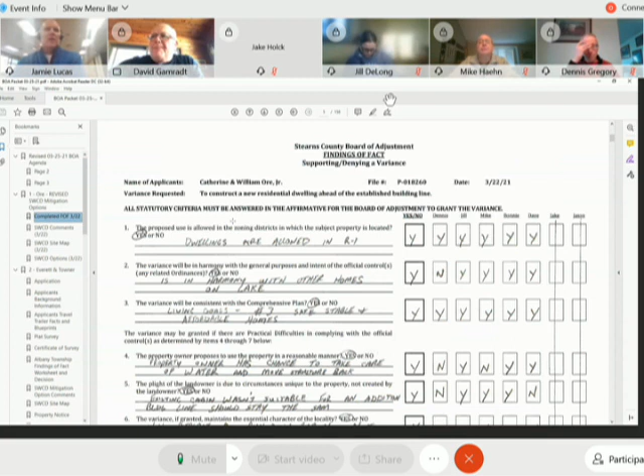Staff, can you give us an update if there's been any changes or any information that you'd like to present to us? Sure. Thank you, Madam Chair, members of the board. Just to reiterate, this is to construct a new dwelling ahead of the established building line. The findings of fact that were obtained Monday night are the ones you see on your screen right now. So really, I've had a little bit of a conversation with Mr. Ore about the mitigation options that were offered by Soil and Water Conservation District. He is now aware of those recommendations, and I think at this point you guys can go through your discussion making a motion for this. Okay.

All right, Mr. Ore, is there anything that you wanted to comment about your discussion with the proposed conditions?

No, Jamie made it very clear about what was being suggested, and I understand it. All right, thank you. Then we're looking for board members. Is there someone that is?

Madam Chair, members of the board, I just want to let you know that I did get some clarification from Mr. Berg at the Soil and Water Conservation District. Mr. Ore brought up a good point that if you look at the mitigation options on the aerial photo—Shelley, can you go up to the next one?

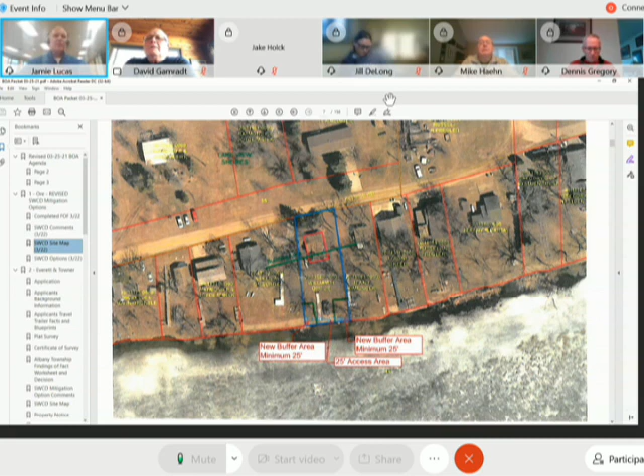Yes, thank you for that clarification. I think we were all kind of looking at that 25 feet going the other direction. Right. And one other thing he mentioned is that their standard for these types of buffers, they recommend that 25% be open for the access area. So if you take 25% of 60 feet, the access area in this situation, their recommendation would be to have 15 feet of access area, and the rest would be buffer. Now, he also said it should be up to you guys as board members to decide if that's the way it should be or not. Okay, thank you, that was just their recommendation.

All right, if we have some discussion from board members in regard to this proposed condition. Anyone have thoughts on what that distance should be, or if this condition should be included?

Madam Chair, Dennis Gregory. As we were discussing Monday night, this is new construction, and I think, regardless of the fact that each of these applicant requests are unique based on the specific conditions of that property, I do think it would be bad policy to allow new construction that doesn't meet the setback requirements and doesn't have a mitigation plan. So I think it should be one or the other, and it seems the applicants are more interested in a mitigation plan.

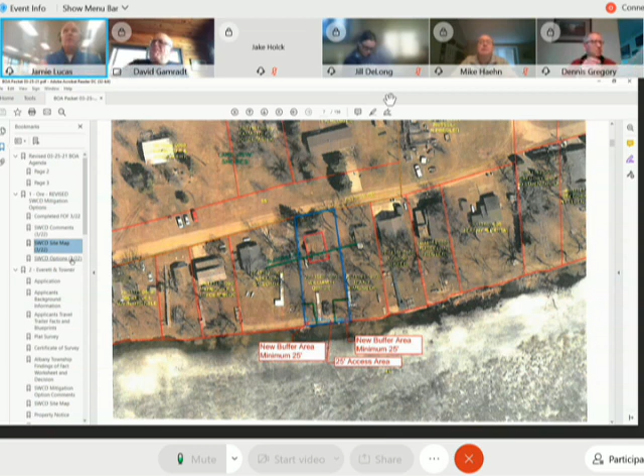Madam Chair, members of the board, can I offer some opinions I got from Greg on that as well? Yes, please do. He said that currently, the way the property sits, there is kind of a ridge at the lake, so there's no way for that water to get over that ridge. So he said a buffer anywhere would be good. That's kind of why he put together—I don't know if everyone saw that second page where he put the green box—he was showing that the house should drain towards the lake, but currently the lake drains back towards the house.

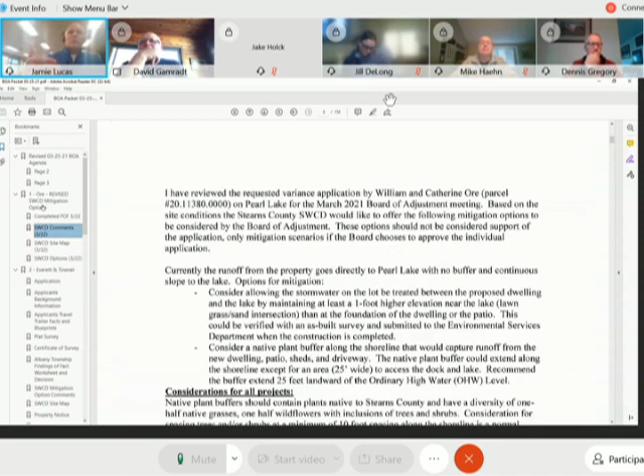So what he was specifying there was he just doesn't want the property owners to fill in that middle area so that everything drains to the lake. He recommended keeping it the way it is right now. He's showing with those red arrows coming from the lake that currently it drains towards the middle of the property to that grassy area there.

Does that make sense? So Jamie, a follow-up question: it says lawn grass on here. Is Mr. Berg indicating that the normal buffer grass would not be in there? Correct, he's just saying it's lawn grass right now. Those are the existing conditions - existing sand and existing lawn grass. That area where those red arrows are, adjacent to the lake, is kind of where that buffer area would be right now, along with their access area.

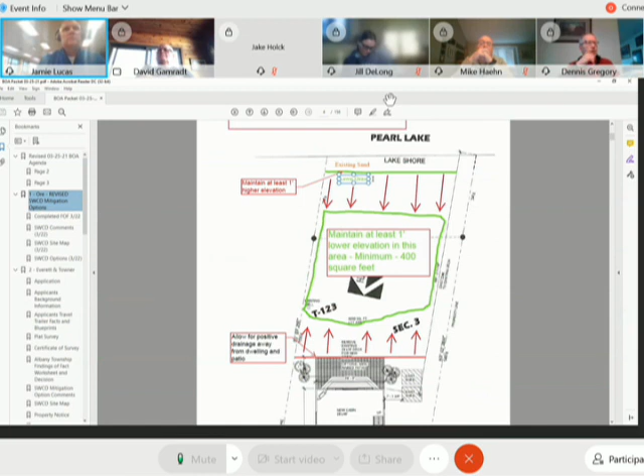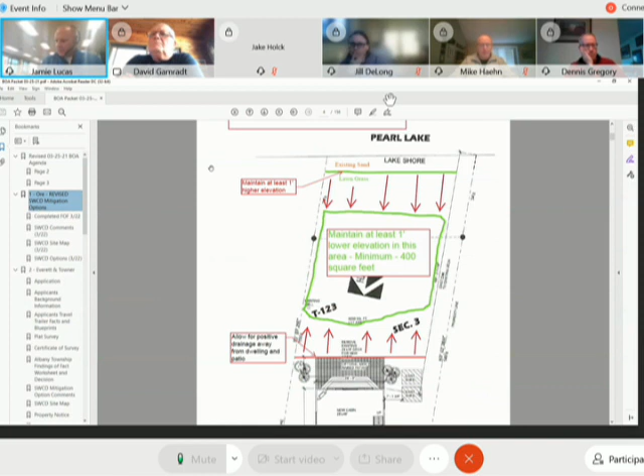So it sounds like it would really be up to the property owner to put the buffer. Correct. He said it didn't matter to him whether we put it in the center. I think he put it there because that's where their dock was. If you look at the aerial photo, he figured they typically have their dock there because when you pull your dock out, you just pull it straight back away from the lake - you don't jog it around on the property. So that's why he put the access area in the middle there. Now if you guys want to leave that up to the property owner, you could certainly do that as well.

Okay, thank you Jamie. Any other comments or questions from board members?

I'd be okay with saying having at least one buffer area that's 25 feet deep from the shoreline. That way it leaves it up to the property owner - they can work with what's best for their property, and we still get that buffer area.

Okay, other comments? Dave Gamradt, go ahead Dave. I would kind of agree with that. I think there should be a minimum of buffered area, and it's up to the landowner how he orchestrates those buffered areas in.

Okay, other comments? All right, it sounds like we're maybe ready to close the public hearing. So moved. Okay, I have a motion to close the public hearing. Is there a second? I'll second. Dave Gamradt. All right, is there anyone opposed to closing the public hearing? Hearing none, the public hearing is now closed.

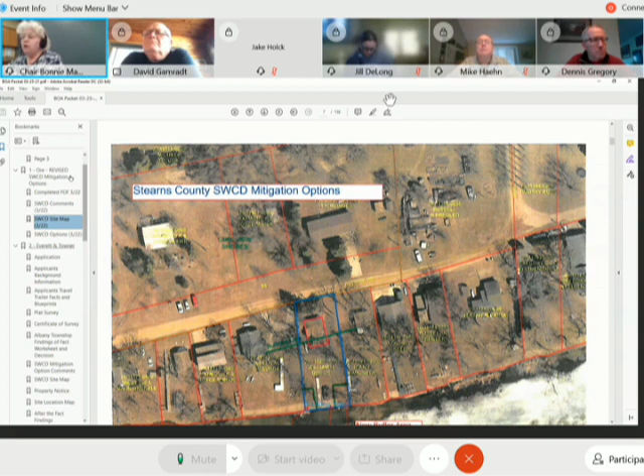Findings of fact have already been done. Is there any comments you'd like to add to findings of fact after the conversation we've just had? If you want to look over the findings of fact on the screen. Hearing none, we'll just accept the findings of fact as they were originally done.

And then we are ready for a motion. Madam Chair, Dennis Gregory, I'd make a motion that we approve the applicant's request for a variance to construct a new residential dwelling ahead of the established building line with a condition that they implement the buffer as recommended by SWCD on 35 feet of their lake shore, leaving 25 feet open. They can choose which 25 feet they leave open, and that buffer would extend 25 feet landward from the ordinary high water level.

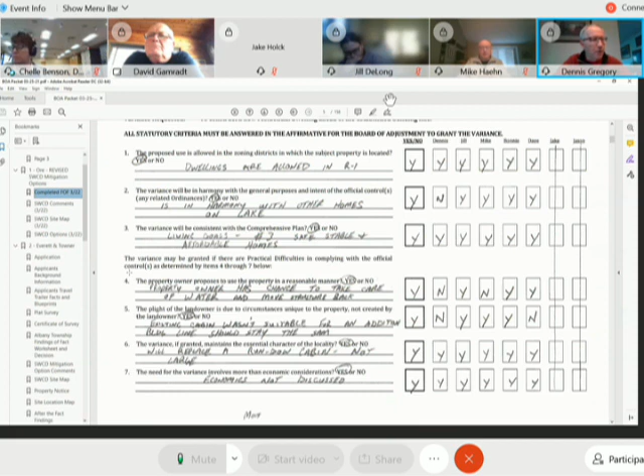All right, do we have a second to that motion? Madam Chair, Mike Haehn, I'll second that. All right, we have a second to that motion, and I'll do roll call of the members present the other evening. Jill? Yes. Dave? Yes. And I am a yes as well. Motion carries.

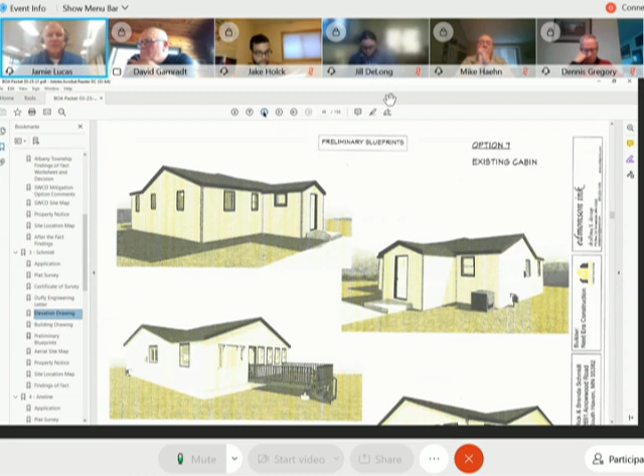If the variance is granted, the applicant will be required to meet the floodplain standards. An additional conditional use permit will be required since the existing crawl space is below the regulatory flood protection elevation. A licensed engineer has developed a plan for meeting the design standards of the state building code. As part of the CUP process, the plans will be reviewed and approved by the DNR to ensure compliance with floodplain requirements.

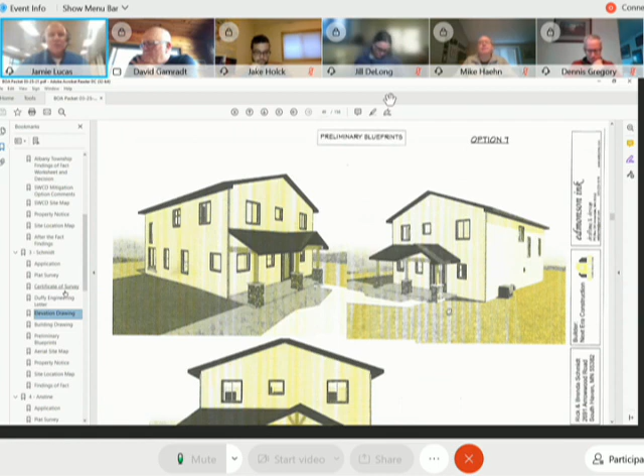The property is in the floodplain and shoreland overlay district of Lake Augusta, classified recreational development. Augusta is on the list of impaired waters for nutrients. The subsurface sewage treatment system was certified compliant in 2020. The current impervious lot coverage is approximately 25.2%, and the proposed impervious coverage when the project is complete will be approximately 24.9%.

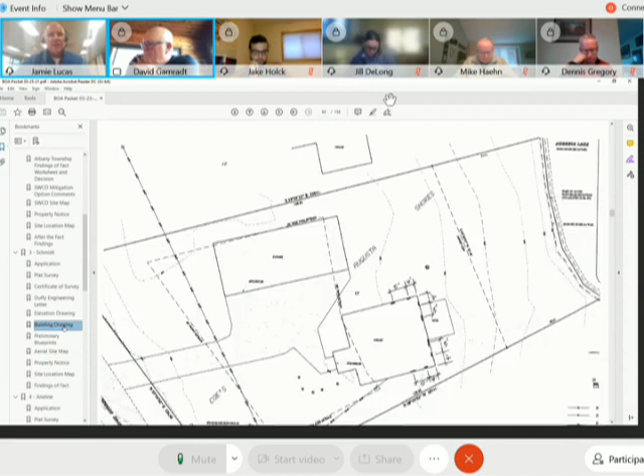The applicant has agreed to remove some of the driveway that will no longer be accessible with the home addition if this variance is granted, bringing coverage to 24.9% with that area converted back to pervious surface. Fairhaven Township, Clearwater River Watershed District, Lake Augusta Association, the Minnesota Department of Natural Resources, and property owners within 500 feet have been notified of this request, and we have not received any correspondence regarding it.

Okay, thank you. Now I'll do roll call as to who was able to visit the site. Dennis? Yes. Jill? Yes. Mike? Yes. Dave? Yes. Jake? Yes. Jason? Yes. And I also visited the site.

All right, we'll go to the applicant, if you have things you'd like to share with us.

I guess just that we bought the place hoping to add on and make it our lake home. Just trying to get everything done the right way. There are a lot of things in this house that need to be done to update it structurally, electrically, plumbing. And if we're going to do all this other work to it, I'd like to make it the way we would like it, because this is our forever home.

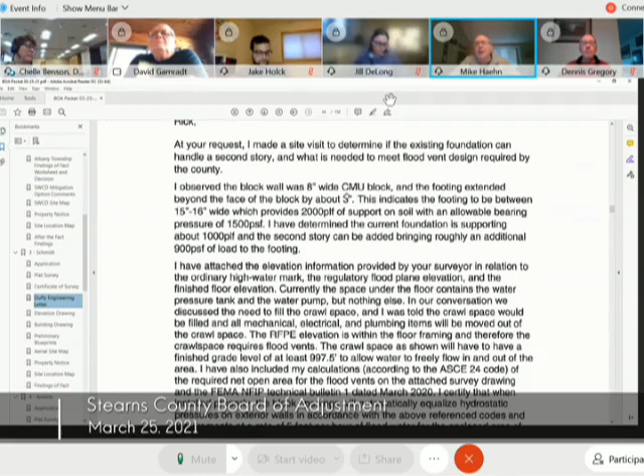Okay, and then also it looked like you had a structural engineer out there for the calculation of the weight. Did they also verify the foundation to make sure everything is okay as far as building, so you don't get into it and then end up deciding the foundation needs to be removed at some point? What I can say, Madam Chair, members of the board, is that the structural engineer said it can hold the weight. Now, whether or not he made that determination clearly, it was not in his letter.

We just asked if we require them to have a structural engineer look at it, and that might be something for us to talk about in the future. We've now had 2 situations where they had this structural engineer sign off on it, and it didn't work out for them. So that will have to be something we as staff and the board maybe have a conversation about - is this really doing what we're wanting it to do? Because I can't say for sure if this foundation will be able to hold it. According to the structural engineer, it should be able to, but I don't know how deep that inspection went. Maybe the applicant, if he was there when the structural engineer was there, can offer some information regarding that.

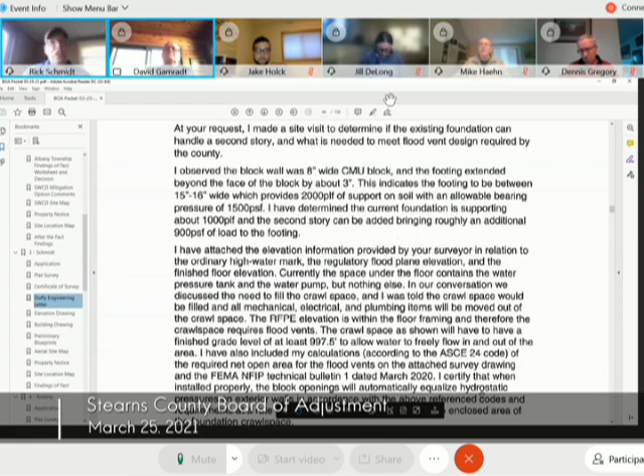Yes, I can. I dug down the foundation before the structural engineer came so that we could get to the bottom of where the footings and everything is, and I did it in 2 spots of the house. He came and looked at it, and he has a formula - I can't explain how he does it - but he used that formula with what was there with the footings and everything. That's how he came to the decision that yes, this will absolutely be able to hold it, and he said it would actually hold a lot more than what we're wanting to put up.

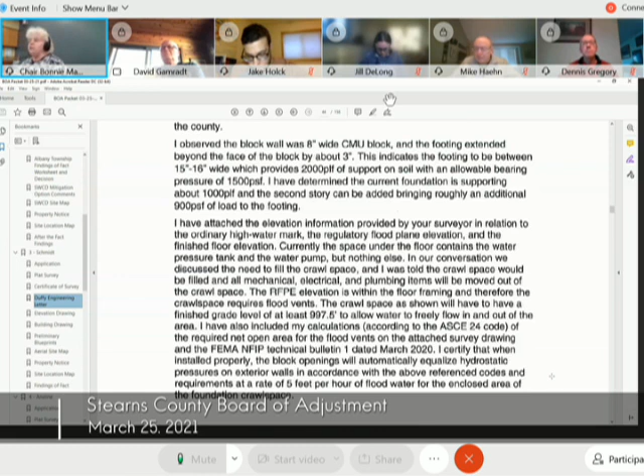Okay, thank you. And Mr. Schmidt, just so you understand why we're questioning this - over the past few months we've had a couple situations in which a structural engineer signed off on something, and then when people started tearing the sidewalls off, they discovered they couldn't use the foundation or structure that was there, and it put the applicant in a really tough spot. So we want to make sure you aren't put in a tough spot by having an engineer say you can do it and then partway through construction finding out you can't. We're just trying to help prevent future problems like that, that's why these questions are being asked.

Additional questions from the board?

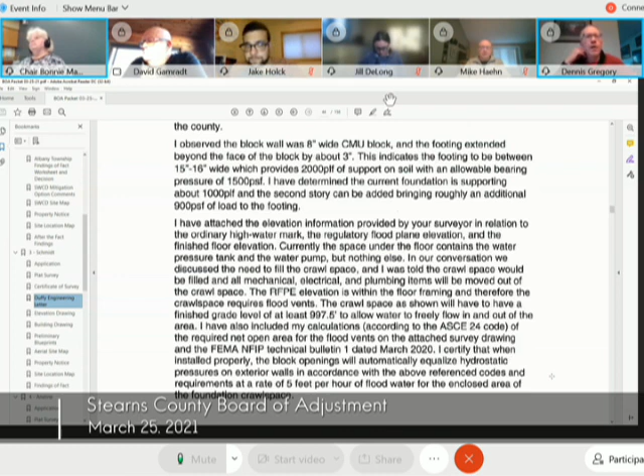Madam Chair, Dennis Gregory - a little bit of a comment, but also interested in the applicant's feedback. It seems like the neighboring properties are all single-story structures, and the house across the road, Thomas Brandt's, is also single-story. It would seem that if the applicant's house was now a 2-story house, that would remove a view of the lake by Mr. Brandt. So just curious about the applicant's thoughts or comments on that.

I've talked to the neighbor about it, and actually from his house you can't see the lake anyway - you can't see over my house and see the lake. The only way to see the lake from his site is if he walks out his door, you can see in between the garage and the house - that's how he gets his view. But he said go for it, he's all for it, he didn't mind at all that I was doing this. Same with all my other neighbors. There are a few other houses that are 2-story, about 5 or 6 houses down towards the east, and about 3 houses down towards the west. But yeah, they can't see the lake from that house unless they're looking in between my garage or in between the houses.

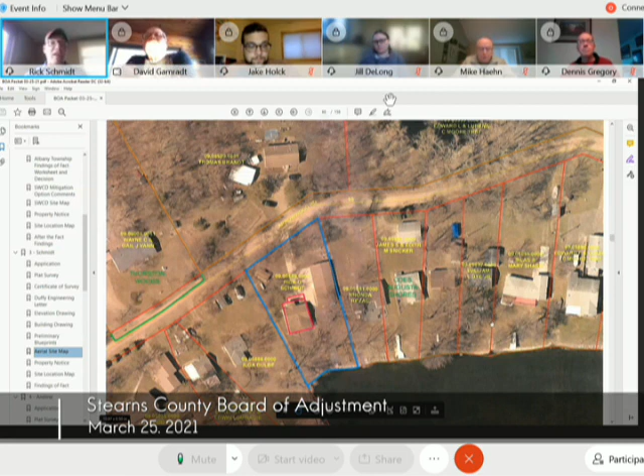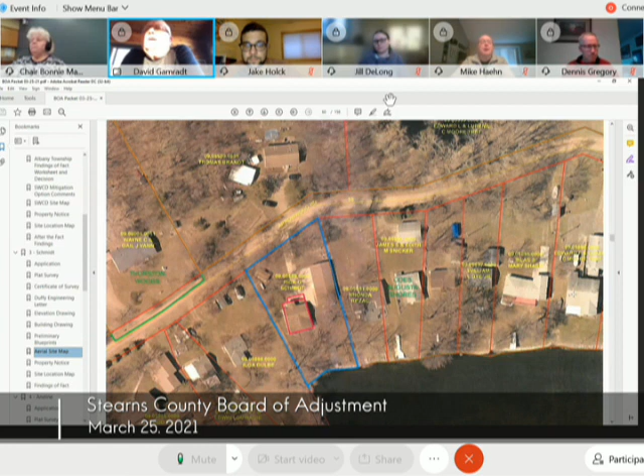Uh, go ahead, Dave. I was looking at that viewing issue, and I determined that in the summertime, when all the trees are out, he couldn't see the lake regardless. If they took all the trees down, possibly he could, but I don't think either landowner would take all the trees down. I was watching the possibility of it being a block for him, and I spent some time looking at it and figured that it would not be an issue.

And I would agree with you, Dave. We drove back and forth on the road there and looked from different angles and agreed that the neighbor really wasn't having a view currently.

Any other questions or comments from the board? Okay, hearing none, we'd be ready for a motion to close the public hearing. Dave Gamradt also move. All right, we have a motion to close. Do I have a second? Second, Mike Haehn. All right, we have a motion and a second to close the public hearing. Is there anyone opposed to closing the public hearing?

Hearing none, the public hearing is now closed, and we will begin with findings of fact. Number 1, the variance request is to construct a second-story addition and overhang less than 10 feet from the side property line, less than 10 feet from the subsurface sewage treatment system sewage tanks, and less than 20 feet from the subsurface sewage treatment system soil treatment areas.

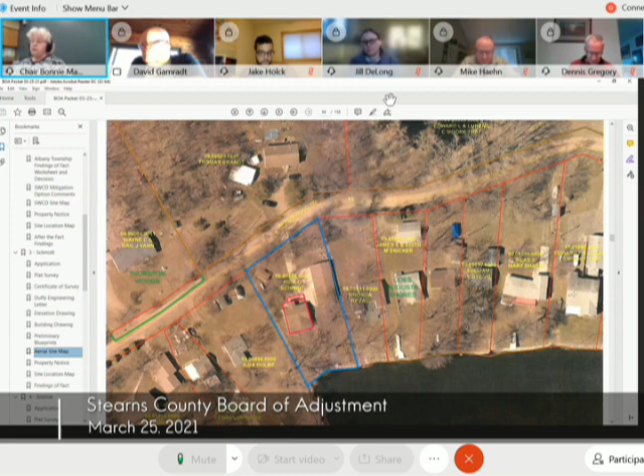Okay, number 1, the proposed use is allowed in the zoning district in which the subject property is located. Madam Chair, Mike Haehn, it's R1 zoned area and it's R1 zoned construction. All right, we have a yes for number 1. Does anyone disagree with that? Hearing none, I'll mark it as unanimous yes.

Number 2, the variance will be in harmony with the general purposes and intent of the official controls and any related ordinances, yes or no? Madam Chair, Jill DeLong. Yes, I do believe it is in harmony with the general purposes and intent of the controls. Those sewage treatment systems are existing. They've been there for decades and they have been certified compliant. I believe that in best practice, it would be in a different spot, but considering that these have existed there for a long time, so that means they are serviceable, that I think it is in harmony.

All right, we have a yes for number 2. Is there anyone that disagrees with yes for number 2? Okay, hearing none, we'll mark that as unanimous yes.

Number 3, the variance will be consistent with the comprehensive plan, yes or no? Madam Chair, Jill DeLong. I believe, yes, it is consistent with the comprehensive plan under lakeshore living policies. Number 3, to discourage the alteration of natural shorelands and the creation of impervious surface in nearshore areas. So because they are right near the shoreland, I think if they had to dig up those tanks and move them someplace else, that would be more disturbance than is necessary.

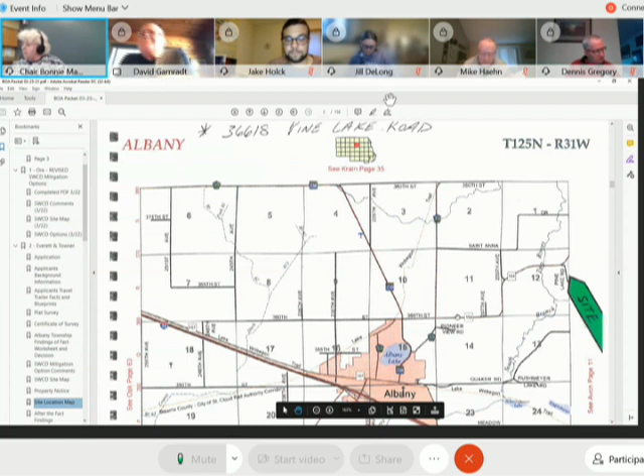The affected property is lots 9 and 10, Block 1, Betty's West Pine Beach, Section 12, Township 125 North, Range 31 West of Albany Township. And the property address is 36618 Pine Lake Road, Avon, Minnesota. And are the applicants with us? Yes. All right, and we'll be back to you in just a couple minutes.

We will do a roll call as to who was able to visit the site. Dennis? Yes. Jill? Yes, and I spoke with Mr. Towner. He indicated that the home they're living in still has a hitch, has tires. It's just got skirts for the winter weathering, that it is still road legal. And he indicated that from his point of view, it still is like an RV, and the sewage treatment system is existing and it hasn't changed. They're just living there all year round instead.

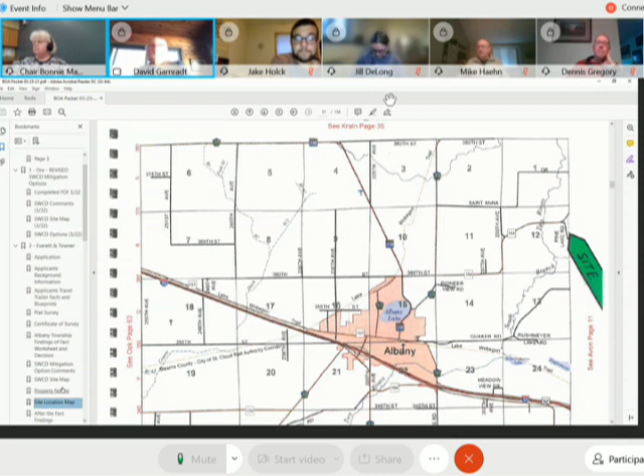Okay. And Mike? Yes, I was there. Dave? Yes. Jake? Yes. Jason? Yes. And I also visited the location.

All right, now we can have a report from staff. Thank you, Madam Chair, members of the board. One item I would like to clarify or make a change to is we received comment from Albany Township. They wanted us to verify and make the change that it is not an actual township road, because they do not maintain this road. So it's actually an unclassified road.

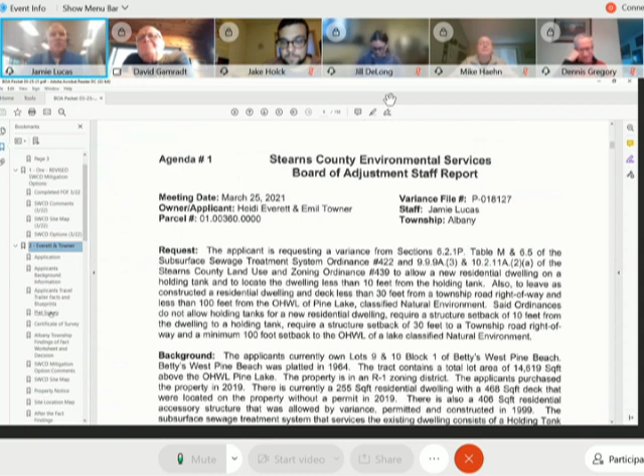The applicants currently own lots 9 and 10, Block 1 of Betty's West Pine Beach. Betty's West Pine Beach was platted in 1964. The tract contains a total lot area of 14,619 square feet above the ordinary high water level of Pine Lake. The property is in an R1 zoning district. The applicants purchased the property in 2019.

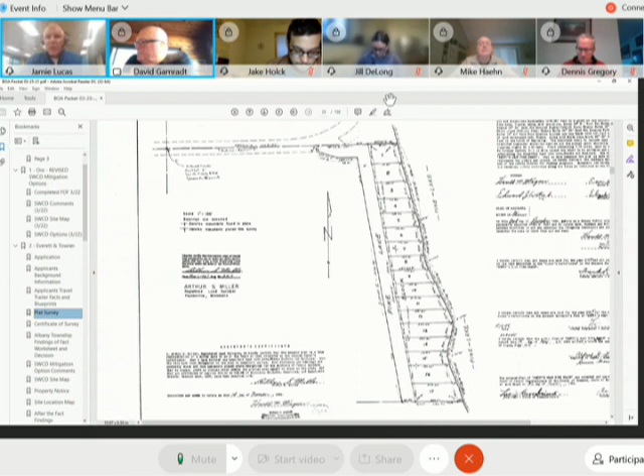There is currently a 388 square foot residential dwelling with a 468 square foot deck that were located on the property without a permit in 2019. There is also a 406 square foot residential accessory structure that was allowed by variance, permitted, and constructed in 1999. The subsurface sewage treatment system that services the existing dwelling consists of a holding tank that was allowed for a previous RV, permitted and installed in 1999.

The system was certified compliant in 2019. On 4/22/1999, a variance was granted to locate an RV accessory structure and holding tank closer to the ordinary high water level than required and closer to the road. On 4/26/1999, construction site permit and septic permit were granted for the RV accessory structure and the holding tank.

On 1/15/2020, we received a complaint regarding a new residential dwelling and deck on the property without a permit. On 2/22/2021, Albany Township granted a variance to allow the residential dwelling that doesn't meet the livable space requirements of the township ordinance. So the applicants are asking to keep on a holding tank...

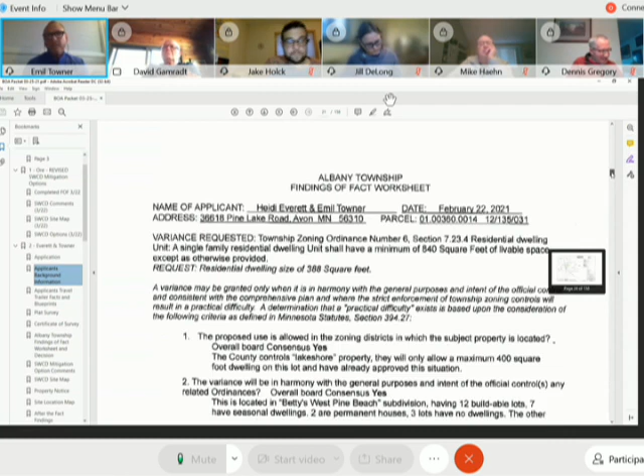We understood the rules. We were moving an RV in here. We weren't trying to move the septic. We did not construct the deck. We weren't moving anything. We put the RV in the same location. Our goal from the beginning, even back in 2018, was to make sure we were doing this right, because we do like this area. We love this lake, we love this road, we like the character of the road, and we didn't want to do anything that was not within the character or within the boundaries of what the county would allow. So from the beginning, our intentions were to work with the county, and hopefully the board and Madam Chair, you see that as evidenced in the documents we provided.

All right, thank you. Now, if we have board members that have questions for either the staff or the applicant.

Madam Chair, Jill DeLong, question for staff. Are there any precedents or other ordinances regarding tiny homes for the county?

Madam Chair, members of the board, we do not have any specific wording for tiny homes in our ordinance. We have a definition of a recreational vehicle, and we have a residential dwelling in our ordinance. Our definition of recreational camping vehicle comes directly from Minnesota state statute, section 327.14, which states any vehicular portable structure built on a chassis designed to be used as a temporary dwelling for travel, recreational, and vacation uses. That's where our department came to the conclusion that this is not just a temporary dwelling, and so we've made the determination that it is actually a residential dwelling rather than a recreational vehicle.

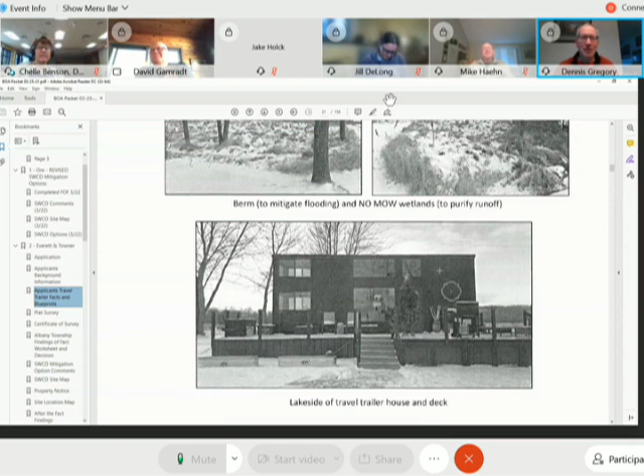But I do wonder about the applicant's comment about how he loves the road. I just about didn't make it up and down that road. I don't want to impugn the credibility of the applicant, but I don't know how he can love that road. Madam Chair and members of the board, if I could comment, since I've been here I've actually taken over some leadership of the road, because the township has disowned it and the county has said it's the township's road, and the township says it's the county's. I've worked with the DNR, and the road should be fixed this spring. It was due to be fixed last fall, so if you come out and visit us again, hopefully you'll have a better experience.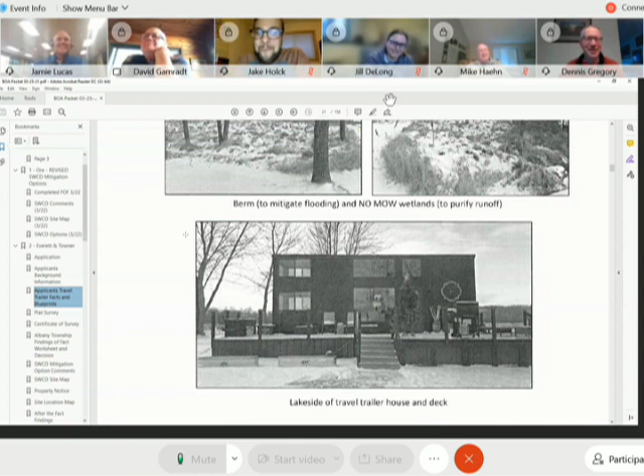Thank you. All right, thank you. I have also driven down that road too many times in the last six months. So we're very glad to hear that improvements are on the docket for it.

All right, additional questions from board members? Okay, hearing none, it sounds like we're ready for findings. Looking at the findings of fact, we're able to do it either as one finding for the concerns of the dwelling and the holding tank, along with the concerns for the deck with the right of way and the distance from the OHWL, or we can do the dwelling and the deck as separate findings. What are the wishes of the board?

Madam Chair, I would make a motion first to close the public hearing. Oh yes, thank you. Do we have a second for that? I'll second it, Mike Haehn. Anyone opposed to closing the public hearing? Okay, the public hearing is now closed.

And what are the board's wishes as far as doing the findings together or separately? Madam Chair, Dennis Gregory, I would suggest we do them together. Any other comments? I would agree. Agree. I agree, Jill DeLong. Okay, thank you, so it sounds like the majority agreed to do one findings of fact.

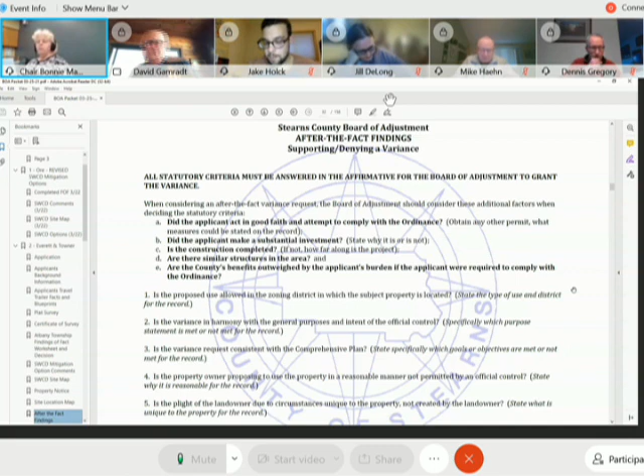This findings of fact is for the variance request to allow a residential dwelling on a holding tank and to locate the dwelling less than 10 feet from the holding tank. Also to leave as constructed a residential dwelling and a deck less than 30 feet from a township road right of way and less than 100 feet from the OHWL of Pine Lake, classified natural environment. As this is an after-the-fact application, the questions will be worded slightly differently. Number one, is the proposed use allowed in the zoning district in which the subject property is located?

Madam Chair, Jill DeLong, the property is in an R1 zoning district and it is allowed to live in a structure in an R1 zoning district. All right, we have a yes for number one. Does anyone disagree with yes? Hearing none, we will mark that as unanimous yes.

Number two, is the variance in harmony with the general purposes and intent of the official controls? Madam Chair, Dennis Gregory, in this case the applicant didn't really change anything on the property that was there prior, and they also have existing buffers on the property to mitigate any impact on the lake. So I think this is very much in harmony with the general purposes. All right, thank you, we have a yes for number two. Does anyone disagree with that? Madam Chair, Jill DeLong, I'm not going to say that I disagree with it, but I just want to call in...

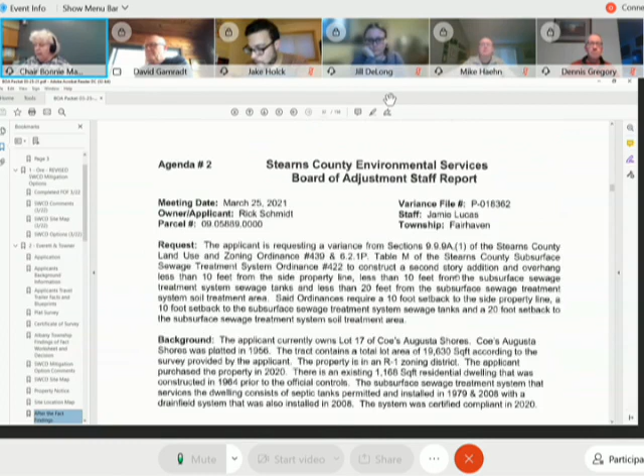Number 6, will the variance maintain the essential character of the locality? Madam Chair, Mike Haehn, I believe the character of the neighborhood is not going to be impacted by this being there. All right, we have a yes for number 6.

Anyone disagree? Madam Chair, Jill DeLong, I want to agree and also state that it was a site for an RV before. They have an RV there now, so that does not change at all. Yes, and I would also add that this area has RVs and regular residences, so it's quite a mixture already. We have a yes for number 6. Anyone disagree? We'll mark that as unanimous yes.

And number 7, the need for the variance involves more than economic considerations, yes or no? Madam Chair, Jake Holck, economics were not discussed. This is about a living choice versus economics. Okay, and we have a yes for number 7. Anyone disagree? Hearing none, I'll mark it unanimous yes.

We are ready for a motion. Madam Chair, Dennis Gregory, I would make a motion that we approve the applicant's request for a variance to allow a new residential dwelling on a holding tank and to locate the dwelling less than 10 feet from that holding tank. Also to leave as constructed a residential dwelling and deck that's less than 30 feet from the township road right-of-way and less than 100 feet from the ordinary high water level of Pine Lake, with the condition that the applicant maintains the existing buffer that they currently have, allowing for a 25-foot wide lake access, and that they submit to environmental services on their site plan survey the size and location of the buffer that currently exists.

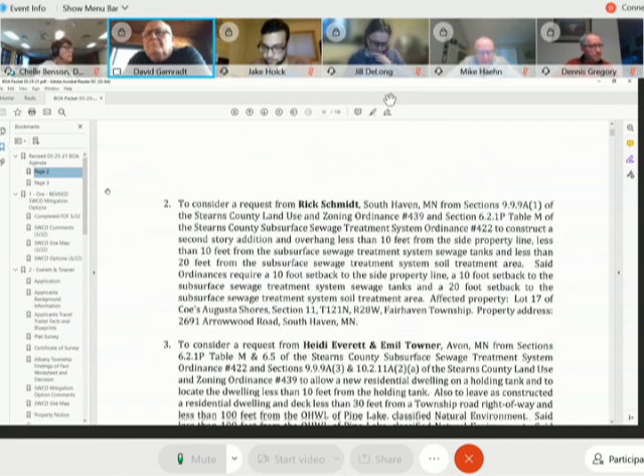All right, our next item is our fourth item on the agenda, but it is number 3 in your packets. To consider a request from Brian Anstine, Avon, Minnesota, from section 6.2.1I and 10.2.11A1A of the Stearns County Land Use and Zoning Ordinance 439 to leave as constructed a residential accessory structure in an R1 zoning district with an exterior color that doesn't match the exterior color of the principal residential building, and to locate the structure less than 100 feet from the OHWL of a lake classified as recreational development.

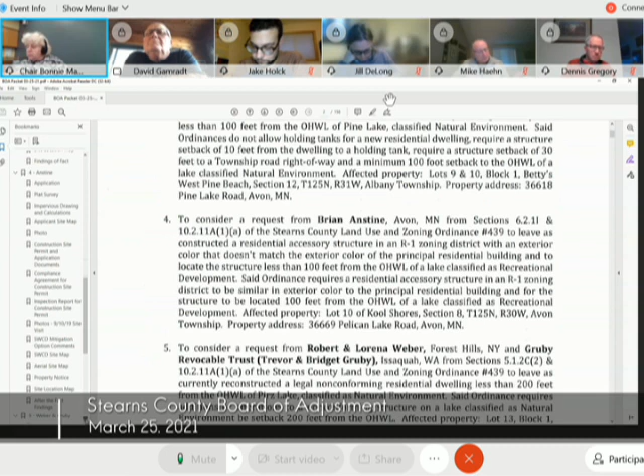The said ordinance requires a residential accessory structure in an R1 zoning district to be similar in exterior color to the principal residential building, and for the structure to be located 100 feet from the OHWL of a lake classified as a recreational development. The affected property is Lot 10 of Kool Shores, Section 8, Township 125 North, Range 30 West of Avon Township. The property address is 36669 Pelican Lake Road, Avon, Minnesota.

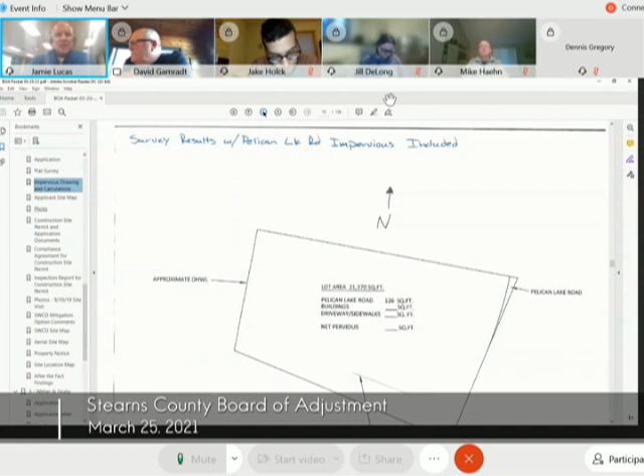Kool Shores was platted in 1959. The tract contains a lot area of approximately 23,370 square feet on Pelican Lake. The property is in the R1 zoning district. The applicant purchased the property in 2015. There is an existing 2,479 square foot residential dwelling with attached garage and a 209 square foot deck that are conforming structures. There is also a 128 square foot residential accessory structure that was constructed prior to the official controls.

The subsurface sewage treatment system that services the existing dwelling consists of a septic tank and drain field system that was permitted and installed in 1998. The system was certified compliant in 2019.

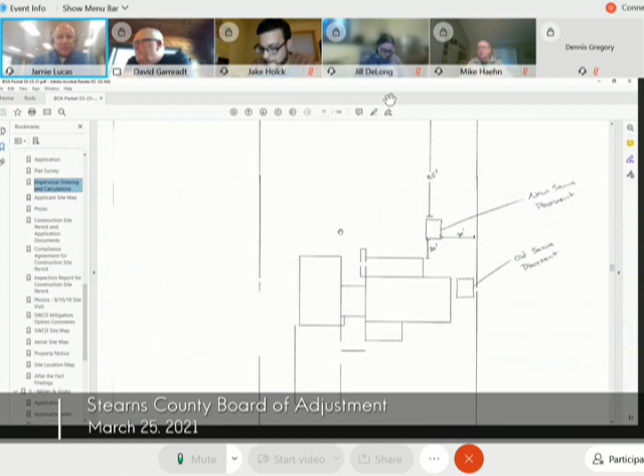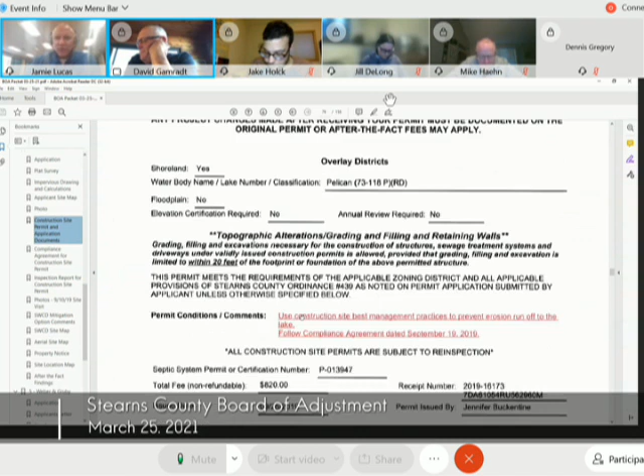A little background information with regards to permits. On 8/26 of 2019, the property owner applied for a construction site permit to replace the existing entryway on the residential dwelling. On 9/10 of 2019, during the site visit for that permit, environmental services staff noticed what appeared to be a newer 12 by 8, 96 square foot residential accessory structure located between the dwelling and the north property line. Upon review of permits, it was determined that the 96 square foot accessory structure was not permitted and was not meeting the required setback to the existing dwelling and property line.

Now, to clarify that a little bit, I had a conversation today with Bonnie, and she pointed out that structures under 150 square feet do not need a permit, but those structures do need to meet setbacks to be considered a permitted structure.

On 9/19/2019, Environmental Services staff provided the property owner with a compliance agreement for the removal or relocation of the accessory structure. On 1/12/2021, ES staff did a site visit to verify that the conditions of the compliance agreement were met, and the accessory structure was not removed or relocated.

The applicant is asking to keep the existing 96 square foot accessory structure that does not match the exterior color of the residential dwelling, and to relocate that structure to a location that is 85 feet from the ordinary high water level of Pelican Lake, classified recreational development. That spot was chosen because there is existing electrical in that location at this time.

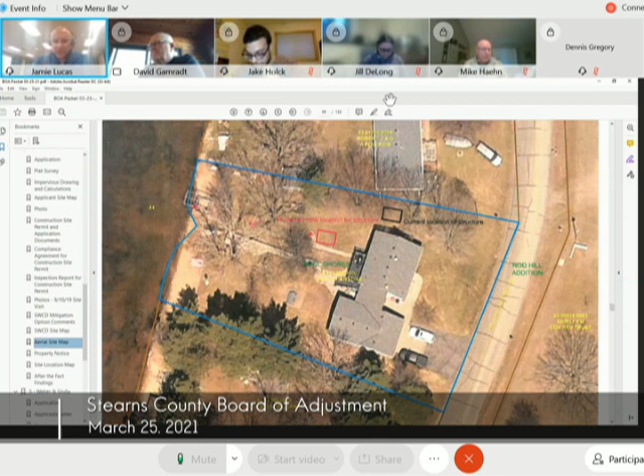Now, I did receive one email with regards to this. It was basically anonymous - I can't tell who the owner is just from the email address - but they said: in our opinion, we don't care about the color of the sauna or that it is another outbuilding on his property, but are concerned about new buildings too close to the lake to protect the waters. I would think he should have space on one side of the house where it doesn't impact any neighbors. I am hopeful the county will make the best decision for the situation and not set precedents for others to make similar requests. So I shared that with the board. There is no name or address attached to it, other than an email address, so you guys can choose to take that as you will. Outside of that, we haven't had any other correspondence with regards to this request.

Okay, thank you. Now, applicant, if you have some comments you'd like to share with us.

There was another drawing with the proposed structure in a different spot. That one was my original thought, but Jamie came out and we did some measuring. That spot would have also been closer than the 100-foot mark, and too close to the south property line. So this one on the screen now was the best place Jamie and I thought the sauna could go, because the property slopes down to the lake, and this is the first spot farthest from the lake and 20 feet from the main dwelling, which I believe is a requirement of the permit. So that red square is the final requested location.

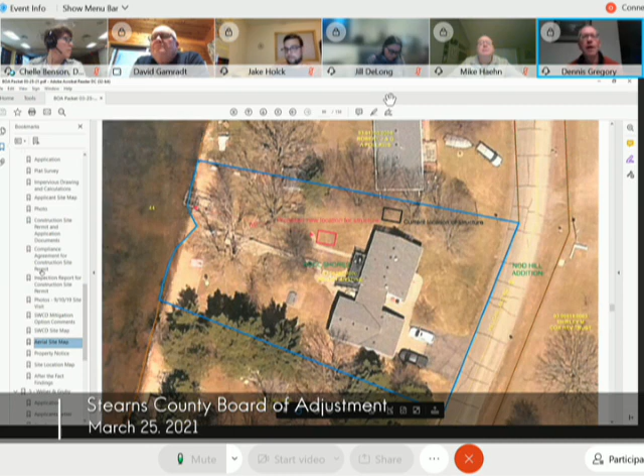Madam Chair, Dennis Gregory, a question for the applicant. I get the natural wood piece for the spa on the inside. I think that's vitally important. But for the neighborhood, would it not make some sense to put a different exterior on? You said you were going to reside the house and have that structure with the same siding as the house once you have it resided?

I was hoping to match colors better, but a natural log siding for the house, I was not planning to do. I would like to do like a steel siding, a no maintenance siding, I guess, and use colors similar to the structure. If you look at it, the logs are stacked on top of each other, so there's no corner. The logs stick out like this on the corners, and they overlap each other. So to put siding on it, it'd be very... I don't know how I would do it.

You could always use a solid base stain. They make a blue stain if you were going to keep the house blue. Yes, you could stain it, and that's what that is. It's just oil. It's been oiled. Okay, additional questions?

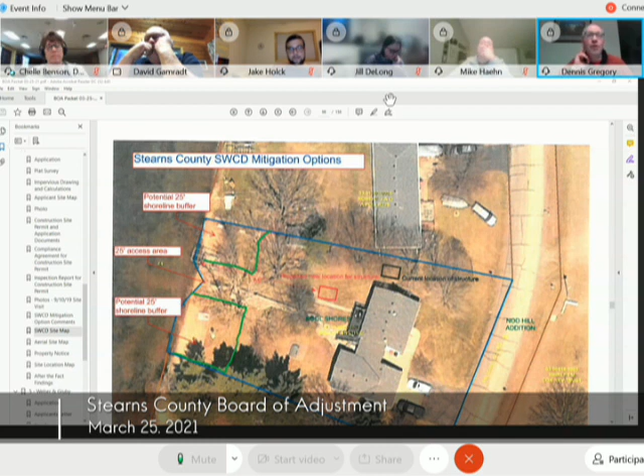I'm clearly not the soil and water expert here, but Mr. Berg, who put this recommendation together, I believe is indicating that in those green areas, you would put a native plant buffer, an unmown area. You would leave a 25-foot wide access to the lake, and the buffer areas would extend the rest of the shoreline other than that 25-foot access, extending 25 feet landward from the ordinary high water level. So that's what he's recommending. And again, I want to get a sense of your thoughts regarding that water mitigation effort.

If we're talking about myself losing beach area by planting native plants on it, I would rather get rid of the sauna. That's why I bought the property, because of the beach and having children.

Okay, thank you for your response. My thoughts in regard to that is, if we were looking at a large accessory structure, but we're talking less than 100 square feet here, and we always need to show some kind of nexus between what's being asked for and what would be conditioned. I would struggle with finding a nexus between the buffers and this building. There might be runoff from the rest of the house, but it would need to be from this building. I would kind of wonder, especially if he's willing to put in the gutters with the rain barrel.

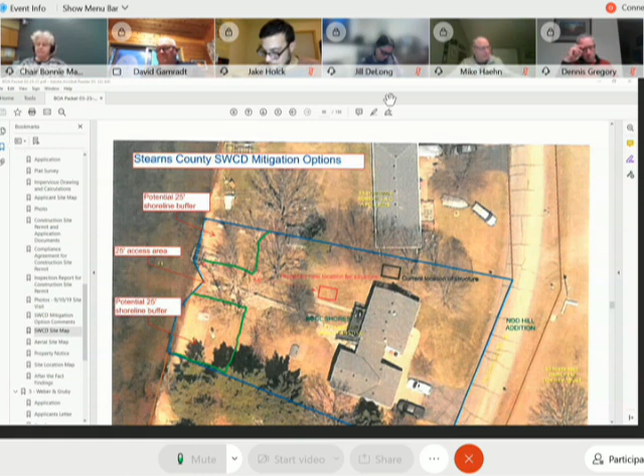And we will go to findings of fact. Again, these will be the after-the-fact findings of fact. Number 1, is the proposed use allowed in the zoning district in which the subject property is located?

Madam Chair, Mike Haehn, it's R1 zone district and accessory structures are allowed in R1 zone area. All right, we have a yes for number 1. Anyone opposed to that? We'll mark it as a unanimous yes.

Number 2, is the variance in harmony with the general purposes and intent of the official controls? Madam Chair, Jill DeLong, I believe that the intent of the controls is having similar looking exteriors of buildings, residentials, and accessory buildings, to make the neighborhood look nice and not have a real mishmash or patchwork of things going on in one property. In this case, the uniqueness of the accessory building's exterior, I don't believe that it takes away from what the property looks like. I think it actually does look nice. It is interesting, and I did see a neighbor building that had similar wood siding on one part of the building as well. So I think it is in harmony.

All right, we have a yes for number 2. Anyone disagree with that? Okay, hearing none, I will mark that as unanimous yes.

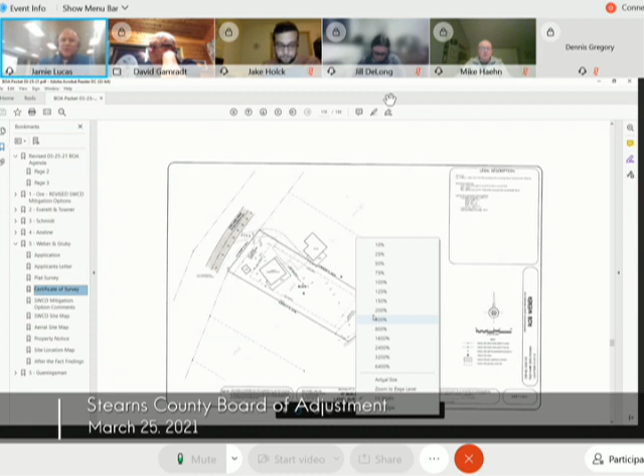Eden Lake Township, North Fork of the Crow River Watershed District, Piers Lake Association, the Minnesota Department of Natural Resources, and property owners within 500 feet have been notified of this request, and we have not received any other correspondence with regards to this request. Thank you.

All right, thank you for that input. And the applicant, if you'd like to share with us your thoughts.

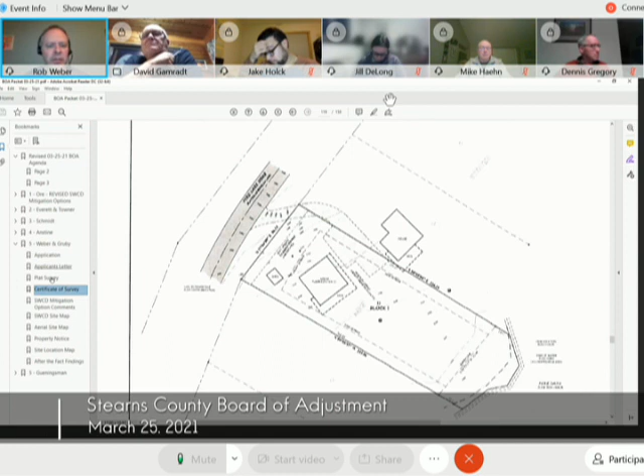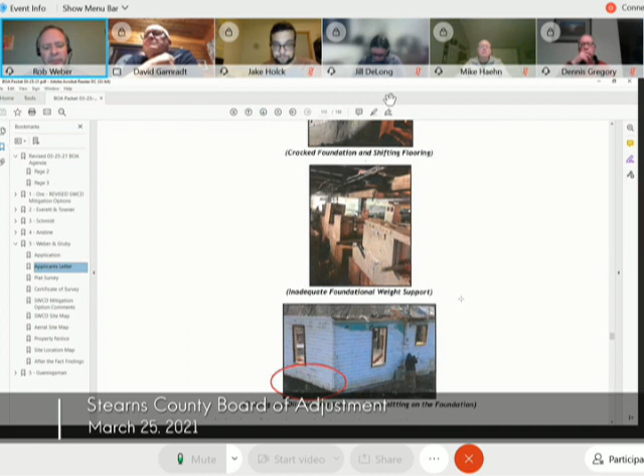Yeah, certainly, and Jamie did a good job of describing the item. And basically, as we got into the construction, the contractor had determined that the existing walls would either need to be shored up, reinforced, etc., and determined that along with reinforcing of the foundation, that it would be better from a structural perspective and a safety perspective to put new walls. So from our perspective, we wanted to make sure that we kept to the existing footprint, kept to the existing plans that we had submitted last year. So thank you for your consideration for this.

All right, thank you. Now, if board members have questions for staff or the applicant. Madam Chair, Dennis Gregory, a question for staff. In June 2020, when the previous variance was approved, were there any conditions to that variance?

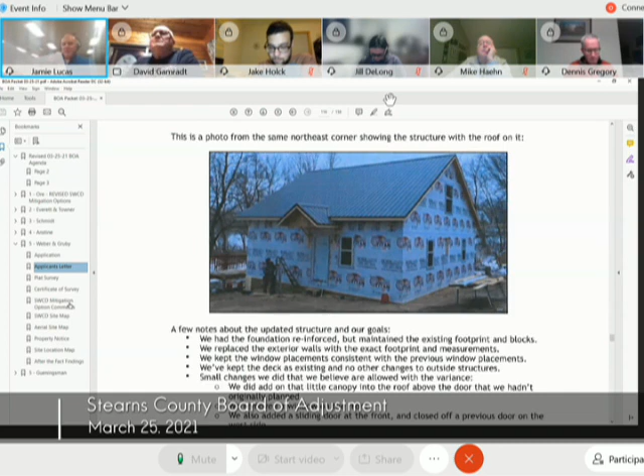They're checking right now. Let me check on that. That's a good question, Dennis. Nope, there were no conditions. And at that time, we did not do the Soil and Water Conservation District recommendation, like we do right now. And so that is why Soil and Water did go out there this time and offer some possible options for you guys to look at.

And so then a follow-up question for the applicant. I assume that you received the SWCD recommendations. And what are your thoughts about putting gutters on the house that would empty into a tile that would empty into the wetland? Yeah, so we did receive it, took a look at it. In terms of the swale between the septic and the wetland, I don't see an issue with that. Seems pretty straightforward. In terms of gutters on the house, not a problem with that.

I had a question I haven't asked yet on the tiling of that. Given that it's a seasonal house, what I wouldn't want is, and I'm not saying we wouldn't do it, but just a question of during the wintertime, does that freeze? Do you get frost in there and then it freezes, and then you get some melt and then it freezes? And I wasn't quite sure why we'd tile directly to that outlet versus having it try to naturally go into the ground. But either way, it's just a consideration. It's not really an issue for us.

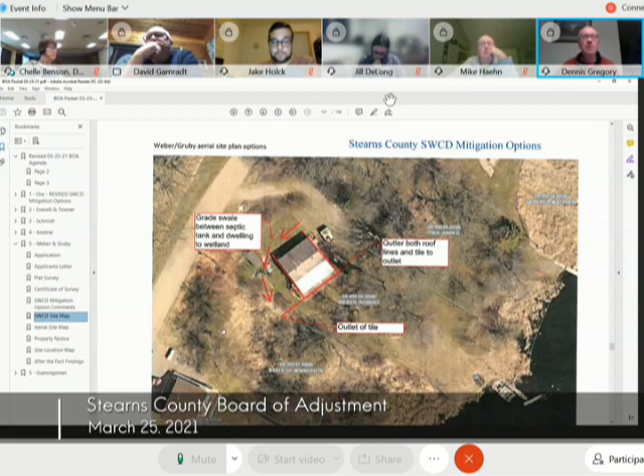Sure, I appreciate your feedback. And unless staff has comments, I don't know that we would know directly the answer because Mr. Berg is not on this call. I would guess that between putting it in a tile and directing it to a wetland, rather than letting it run across the surface of the ground, we're looking for erosion control, and you would probably have more erosion than tiling it to a specific location. But I am not an expert in that area, so I am simply guessing what the thoughts behind that would be.

Madam Chair, did the applicant understand it's like a 4-inch round PVC tube underground with holes in it, not actual tiles? So it probably wouldn't freeze because it has holes in it, and it'd be out of sight.

Okay, yeah, I mean, I guess as long as it doesn't freeze, like a water pipe that freezes in the winter and then it breaks, I just wasn't sure about future maintenance on tiles that are underground. But if it's something that people do and it works perfectly well, it's a 4-inch PVC pipe that's full of holes, and the water would dissipate out of that, so there's not really any standing water in it. Okay, it sounds reasonable.

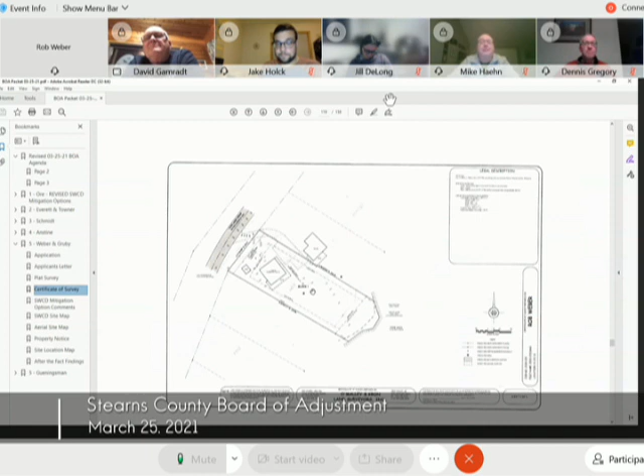Thank you, Mike, for that explanation. Other questions or comments from board members?

Hearing none, are we ready to close the public hearing? So moved, Dennis Gregory. Do we have a second? Second, Dave Gamradt. Second, Jason Crone. Is there anyone opposed to closing the public hearing? Hearing none, the public hearing is now closed.

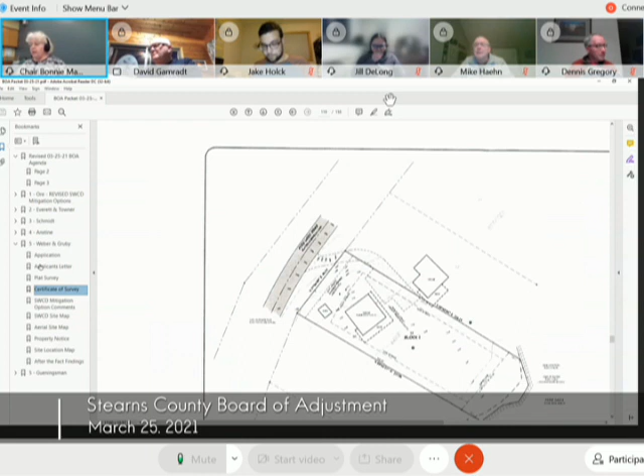We will be doing the findings of fact. This is on the after the fact form, to leave as currently reconstructed a legal non-conforming residential dwelling less than 200 feet from the OHWL of Piers Lake, classified as natural environment. Number 1, is the proposed use allowed in the zoning district in which the subject property is located? Yes or no?

Dave Gamradt: yes, it's in an R1 district and houses are an allowed use. We have a yes for number 1. Does anyone disagree with that? Mark that as unanimous, yes.

Number 2, is the variance in harmony with the general purposes and intent of the official controls? Madam Chair, Dennis Gregory, I believe it is in harmony. The applicant took care to keep the same footprint for the building and is willing to provide some water mitigation to protect the water quality. We have a yes for 2.

Does anyone disagree with that? We'll mark that as unanimous, yes.

Number 3, is the variance request consistent with the comprehensive plan? Madam Chair, Jake Holck, I think it is. Under the Lakeshore Living policies, encouraging implementation of innovative stormwater management practices into shoreland projects such as rain gardens, permeable surfaces, and vegetative buffers. In this case, it's the permeable surfaces and tiles.

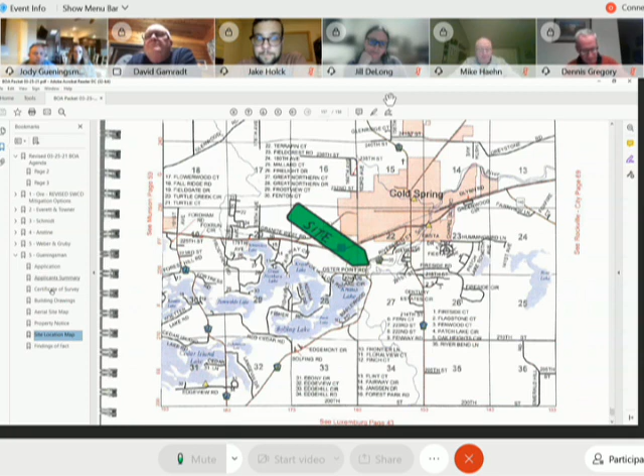All right, if we can do a roll call as to who was able to visit the site. Dennis? Yes, and this was on the agenda back sometime earlier in 2020. At that time, I did visit the site and talked with both Jody and Linda, who provided basically what's in our packet, what the project entailed. Jill? Yes. Mike? Yes. Dave? Yes. Jake? Yep. Jason? Yes, and I also visited the site.

If board members could just keep one thing in mind while they're making discussions, because there are 3 distinct items being asked for, we will have the option to do findings as one finding, or maybe combining 2 and having a 3rd one on a separate finding, or having all 3 on separate findings. We can discuss what we're going to do with that when we get to closing the public hearing, but I think it's good to keep that in the back of your mind as far as what direction you think would be best.

Okay, if staff could give us an overview of this application, please. Sure, thank you, Madam Chair, members of the board. Sorry, my mic shut off there. I'm going to go over the requests separately here so you kind of have an idea.

Request number 1 is to construct a 60-foot by 40-foot, 2,400 square foot residential accessory structure with a 14-foot sidewall height and a 20-foot overall building height. The structure will be located 33 feet from the right-of-way of County Road 49 and 69.2 feet from the ordinary high water level of the Sauk River.

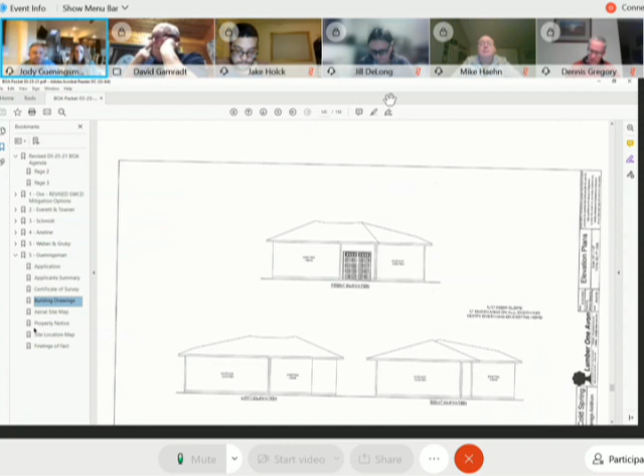We had Nick come out from Soil and Water. We want to do some landscaping projects also that we've already talked with him about. One of the things currently on the property that you saw is an existing boat ramp with retaining wall blocks. One of the things we would like to offer up in order to get the deck approved is that we would be willing to remove that boat ramp from the property. Like Nick had said, it would eliminate runoff and reduce the impervious area. We were just throwing that out there as an option, one of the things we'd be willing to do to help out in order to get the deck approved.

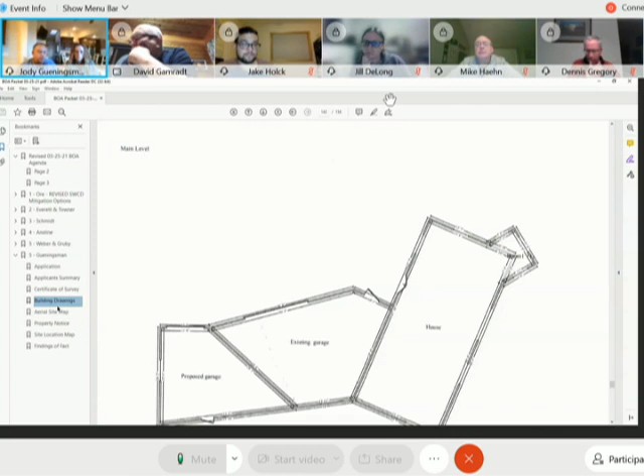Similar situation with the addition on the house - that's for a third stall, basically to park a vehicle in. If the oversized shed is approved, we probably wouldn't need that garage at that point, since the shed would be approved in the larger size.

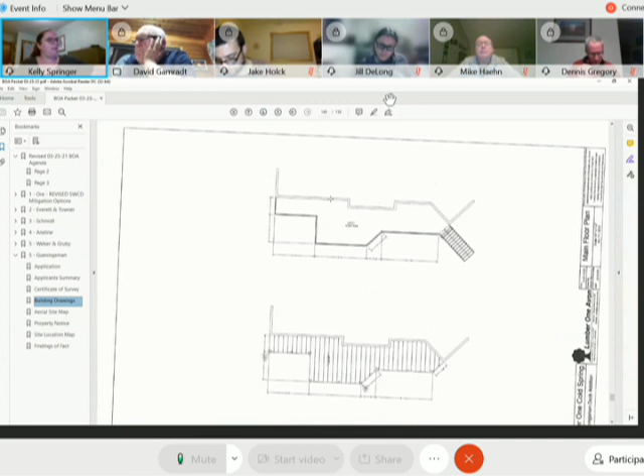This is Kelly Springer, and I just have a question for you, Jamie. You have indicated that the proposed addition to the house and the shed are within the setback area from County Road 49, and I'd argue that's not correct anymore. When we worked with Jody Tyke, we found out that there's the new location of County Road 49 shown on the survey, and then there was an old road right-of-way that goes north along that bold line where you had your highlighted areas. We worked with Jody in the highway department, and that old right-of-way has been vacated. I can give you the recording number for that document - it is Torrens, T43716. So actually the right-of-way is now as shown as the new County Road 49, so both of these things would be outside the 50-foot setback for that issue. We kind of resolved that as part of this process, just to put that out there for the board to consider.

Madam Chair, members of the board, when we had conversations about setbacks and the highway comment, I'm not saying what Kelly said is wrong, but it was our understanding that all of that area was considered right-of-way that is not their property right now. So the 1.9 feet to the property line is actually to the right-of-way according to County Highway and according to Jody when we talked with her for the addition to the home. Again, I don't know that it matters - it's 1.9 to their property line regardless of whether it's County Highway. Maybe that's why County Highway decided they have no comment on this, because there's plenty of room between the proposed addition and wherever that right-of-way happens to be.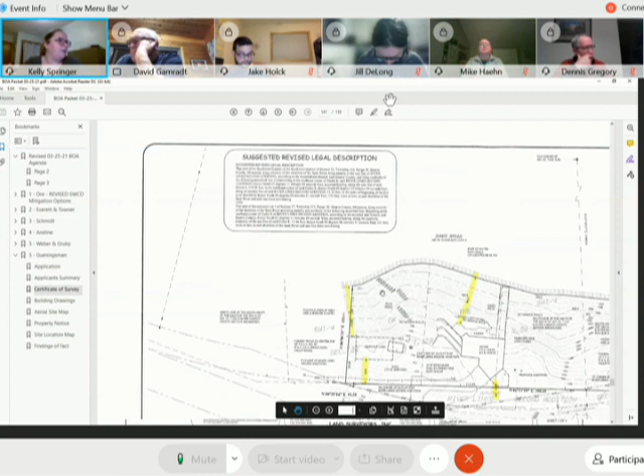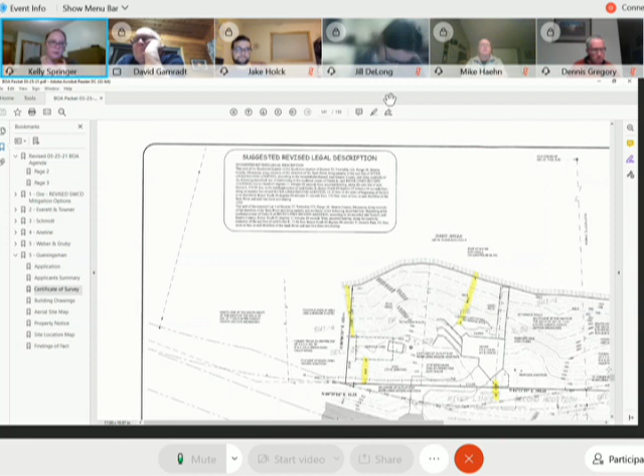We would also highlight, as I have in the proposed findings we submitted, that the Gueningsmans offered to remove the boat ramp. We spoke with Nick Neuman over at Stearns County Environmental, and he was pretty jazzed by that because it will greatly reduce runoff into the Sauk River, which is a threatened waterway. Right now it's just a ramp right into the water, promoting runoff. Replacing it with grasses on the upper end closer to the house, and native plants, water gardens, rain gardens closer to the water, will really help reduce runoff and erosion. We quoted some of our conversations with him in our submitted material.

Okay, thank you. Do we have anything additional from the applicant or representative at this time? I think that was everything we wanted to touch on. Okay, then we will go to board members that have questions of the applicant or of staff.

Madam Chair, Dennis Gregory, a question for the applicant. Did you consider building a pole shed that met the requirements of 1,500 feet, that still could store the vehicles? What would be the downside to having a shed of that size versus 2,400 feet?

Just the physical size—two vehicles, a pickup and an SUV, pontoon, the boat, the fish house, lawn care products and tools. That was the reasoning for putting that third stall onto the house: if we weren't going to get that larger shed, we needed the third stall on the house in order to house everything, so we don't have it outside. Thank you.

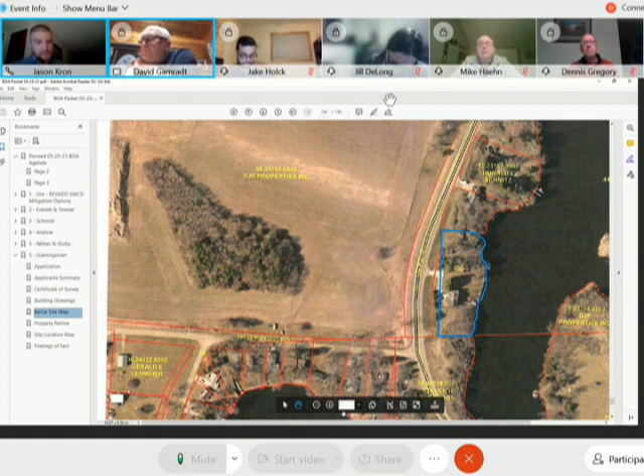Sure. On the shoreline side, if that ramp comes out, most likely we will be putting some sort of vegetation in its place. It'll be seeded, but also some sort of taller, native grasses to slow it down before it hits the river. Okay, thank you.

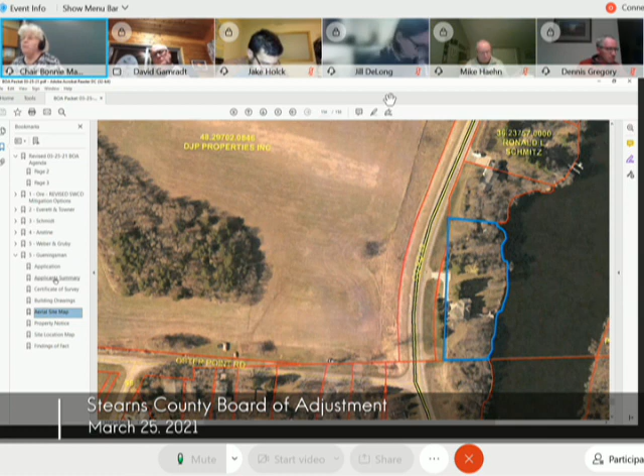Okay, I have one question—I don't know if it's the applicant or their representative who wants to answer this. On the memorandum that they sent out to us, I believe on page 2, number 3, second paragraph, it states the pole shed they are requesting will allow them to use their property in the ways they wish and allow for the property to be adapted to other uses than what it may have been built for. That statement is a little confusing to me as far as other uses. Are you talking about running a business out of there, or what type of other uses were you thinking of?

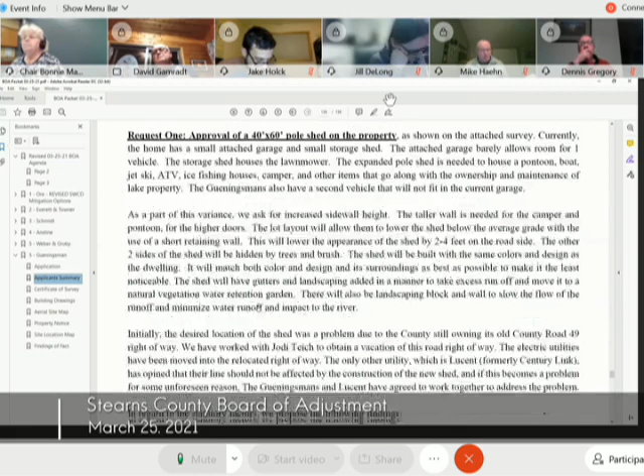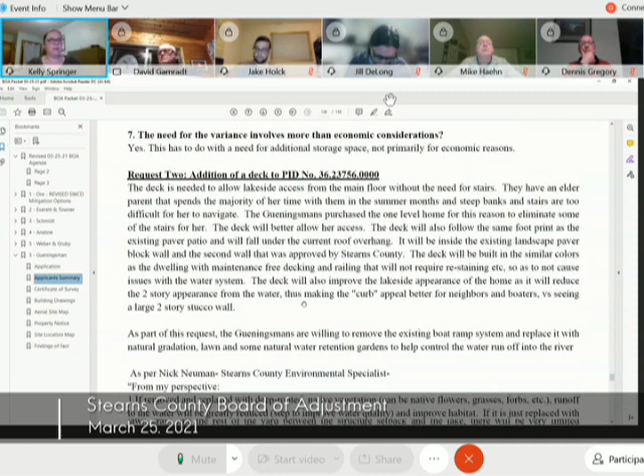I'm just catching up on this. Kelly, are you more familiar with that? I think we were just referring to the size. If you look at the size of the house, kind of a smallish garage, the house by itself is not designed to have all the toys you normally have with a riverside property, various landscaping equipment. It doesn't appear it was originally designed to hold multiple vehicles, a pontoon, a boat, whatever. If you look at the garage, it's not designed for that, so it's allowing for expanded recreational uses. I apologize for the confusion there.

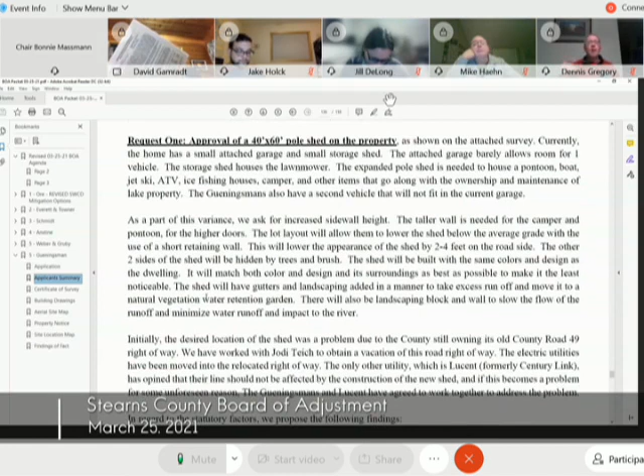Okay, so expanded recreational uses, not commercial uses? No, there will be no commercial uses in the shed at all. All right, thank you.

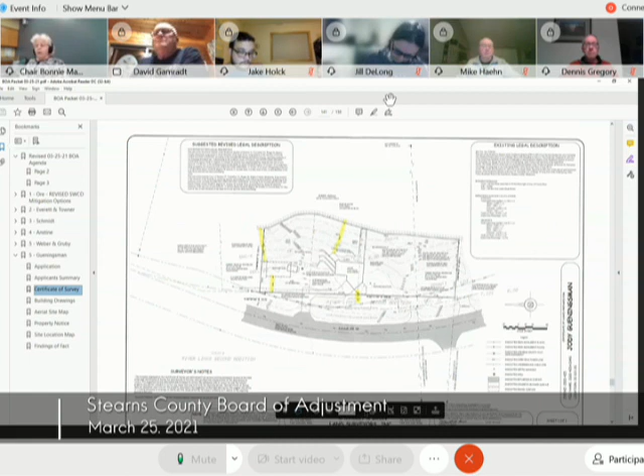Other questions from staff or from board members? Okay, if we don't, then I believe we're ready to close the public hearing. So moved. We have a motion from Dennis to close the public hearing. Is there a second? Dave Gamradt, I'll second. We have a motion and a second. Does anyone disagree with closing the public hearing? All right, the public hearing is now closed.

Board members, we have options. There are 3 distinct requests here as part of this application. We can either do them some combined, all combined, or all separate. What would be the wishes of the board of how we would do findings?

Madam Chair, Jill DeLong, I think they're all 3 separate findings in my opinion. All right, do we have anyone that concurs with that? Madam Chair, Dennis Gregory, I'd be fine with that. I'd also be fine with combining request number 2 and 3 together. Madam Chair, I'm with Dennis. The house addition and the deck would be 1, and the pole shed would be a second. I agree with Dennis. Okay, and I would also agree with combining the deck and the house addition and having the pole shed separate.

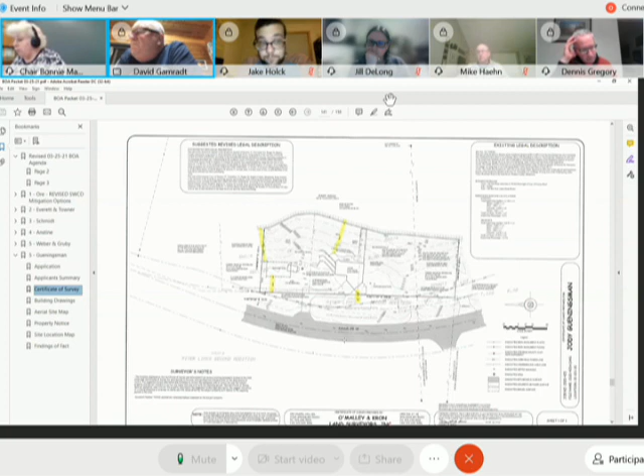Any other comments? Madam Chair, if I may, if we do just 2 findings, it might be good to do request 2 and 3 first, and then request 1 second. And request 1, you're talking about the shed, right? Shed, yes. All right, it sounds like the majority was okay with us doing request 2 and 3 together, which would be the addition to the residential dwelling and the deck. So we will proceed in that manner.

Just give me a second here. I have a stack of findings in front of me and I want to make sure I'm using the right one. All right.

Madam Chair, Dave Gamradt? Yes. Would there be a sequence of this that applicants would prefer? If we do one or the other first? Applicants, if you'd like to comment on that? That would depend on the findings for the other 2 requests. Like we had said, we're open on the additional garage if we can get that larger shed. Otherwise, we're going to be very limited in storage capacities. I don't want vehicles and such sitting out in the yard and causing problems and upsetting neighbors. I don't like it myself.

Well, I think we can do it either way. If it would be approved that, if the addition was approved and the shed as requested would be approved, you could choose to do both or not do the addition onto the house. I'm not sure it will make a difference to board members which order they go in. I have a feeling they'll probably vote the same way regardless of which direction we do it. Yeah, so then it wouldn't matter for us. All right, whichever order you want.

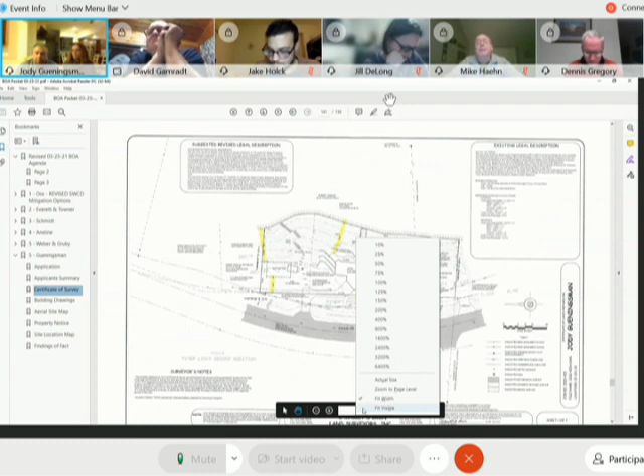I do have a comment regarding the corner, the steepness. Go ahead, Jody. Jamie had completed what I think was called a bluff survey. Obviously, it does fall off. There will be a retaining wall built and proper drainage for that, whatever the permits require, the best construction practices. We're not going to build it and then have it slide down into the river. So it would be landscaped and drain tiled, whatever the contractors would deem necessary to make that area work.

We don't have that plan because we didn't know what size shed we were going to get approved, and that would move it back and forth. 10 feet forward in that corner makes a huge difference in the elevation drop. So the smaller shed would tighten it up and bring it out of that steeper area quite a bit.

Madam Chair, I'd like to suggest that maybe we don't do a separate findings, because if it's going to be a smaller shed, possibly the location might be different. It sounds like there's some details that could be hammered out that might be better taken off of our plates tonight and let them figure that out first.

The shed would be in the same location. It would just be a matter of the size, if it would shift 10 feet forward or back.

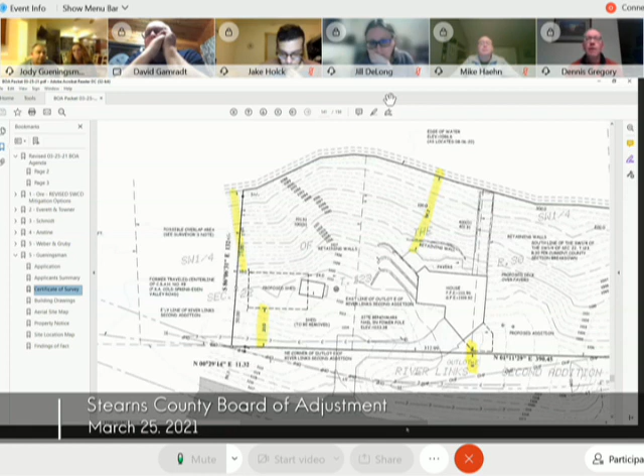Madam Chair, taking off of Member DeLong's comment, maybe there's a couple of different choices here. One is, I don't know if we can continue it so that they don't have to go back through the entire process. I personally would not want to get into a negotiation on shed size this evening. I think there's multiple opinions on that. I would be personally okay with doing a findings of fact on the setbacks, but do want to make sure that all members are comfortable with that process.

I've gotten the nod from staff that it would be acceptable if we would wish to continue this so that we can allow for findings on another variation of this without them having to pay the fees a second time. But first I'll ask board members, is there anyone that would be opposed to us doing findings on the setback from the road, the lake, and the river?

Madam Chair, Mike Haehn. If the shed gets smaller, we don't know the exact setback from the road or the lake because we don't know what size it is. So until we know the size, we won't know the setback we need from the road, the lake, or the river. I think if we're going to continue this with a different size shed, they need to propose that, and then we'll consider those two options at that time.

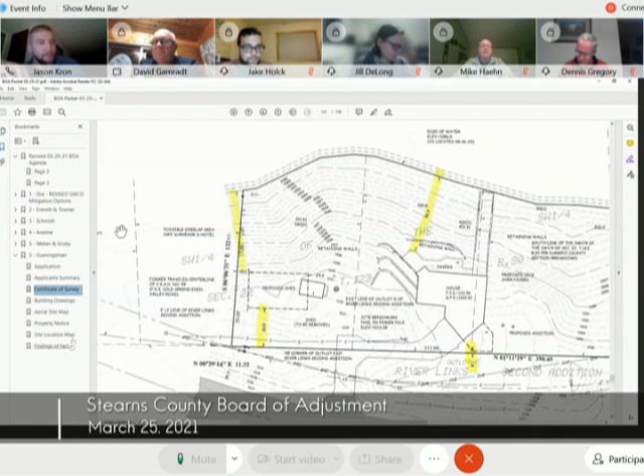Number 6, the variance if granted maintains the essential character of the locality. Madam Chair, Jason Kron, it's partially screened, and it's a shed that is of size that fits the rest of the area, so it's appropriate. Number 6, we have a yes. Does anyone disagree with that? We'll mark that as unanimous yes.

Number 7, the need for the variance involves more than economic considerations. Madam Chair, I don't believe economics were discussed as part of this option. We have a yes for number 7. Does anyone disagree? We'll mark that as unanimous yes.

We are ready for a motion. Madam Chair, Dennis Gregory, I would make a motion that we approve a variance to locate a residential accessory structure not less than 33 feet from the right-of-way of County Road 49 and not less than 78 feet from the ordinary high water level of the Sauk River, with the condition that the applicants implement the water mitigation plan as proposed by SWCD.

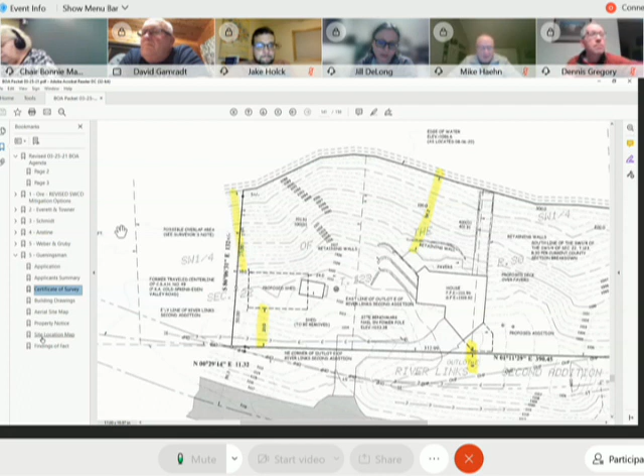We have a motion. Do we have a second? Madam Chair, Mike Haehn, I will second that. We have a motion and a second. We will do roll call on the remainder of members. Jill? Yes. Dave? Yes. Jake? Yes. Jason? Yes. And I will also be a yes.